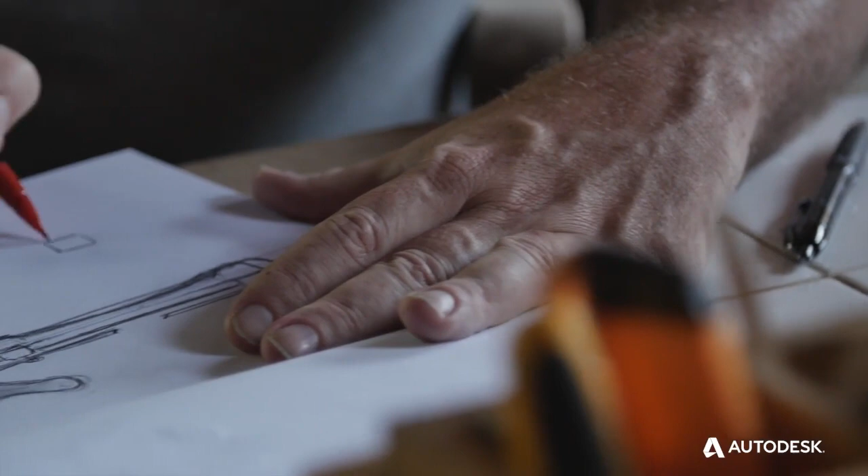The first computer-aided design tools were little more than replications of the drawing board on a computer screen. Soon after their introduction, people realized that while creating drawings on the computer was not necessarily faster than doing them by hand, editing them certainly was. Improved editing capacity made it possible to make more significant modifications to the design more frequently because of the reduced turnaround time in the change process.

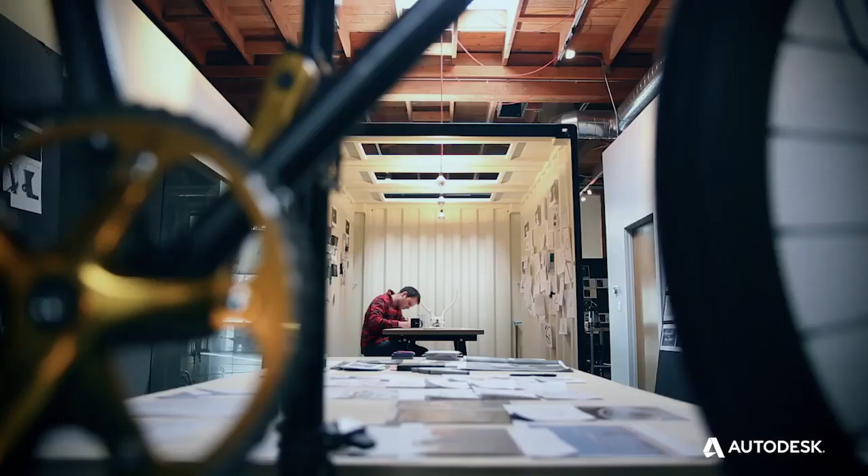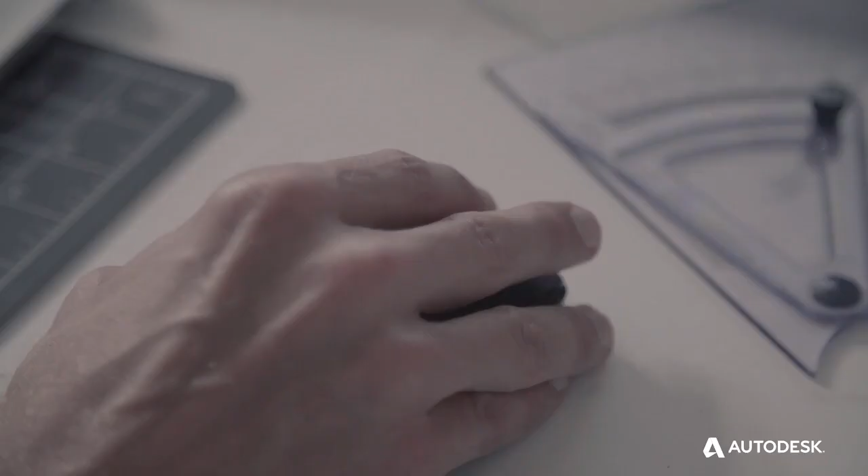The practices created for the drawing board existed because it was impossible to communicate three-dimensional data to people along the development process, but perhaps that wasn't true anymore. People started to ask why the computer couldn't develop the two-dimensional views required by manufacturing from a three-dimensional model, and some even questioned whether two-dimensional drawings would remain valuable in the future. Many predictions were made, and in most markets still remain unrealized, of a paperless design environment.

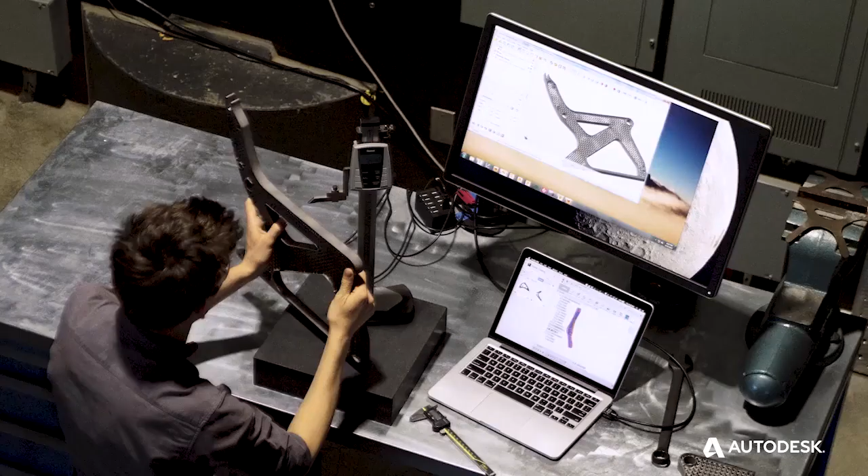These technologies changed the landscape of the engineering department. Where there were three tiers—drafters, designers, and engineers—there were now new options. Some companies merged the roles of drafter and designer, while others put more of the design process and detail in the hands of the engineers.

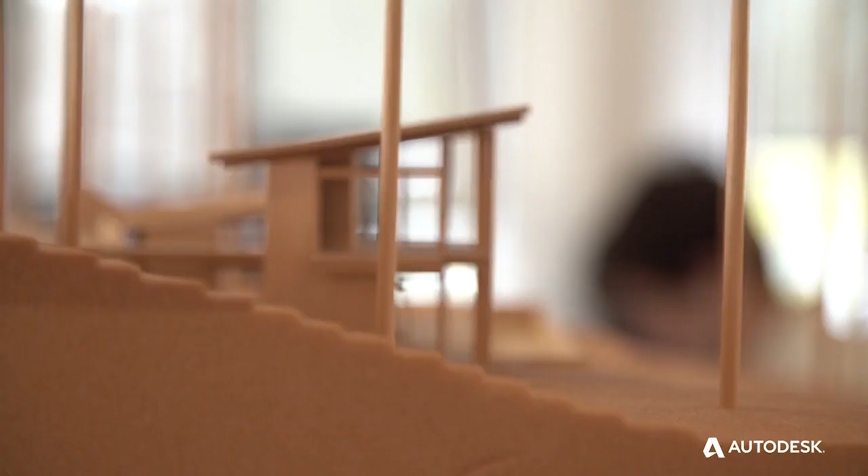Once development of 3D design systems began in earnest, the limitation became less about the vision of the people creating the software applications and more about the limitations of the computing power available at the time. In the mid-1980s, when CAD first began to expand in use, the basic system that would run AutoCAD cost roughly the same as a new car. A 40 megabyte hard drive was too large for the operating system to use in one partition, and 1 megabyte of RAM was exceptional. Of course, this was all just one side of the CAD CAM story.

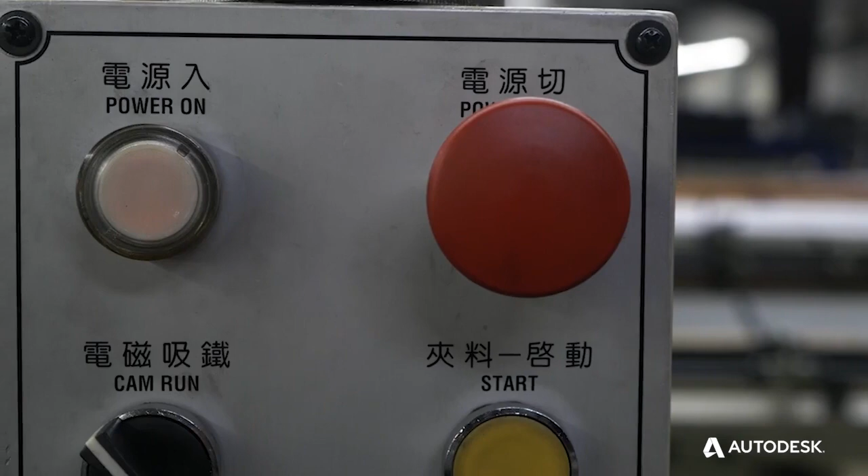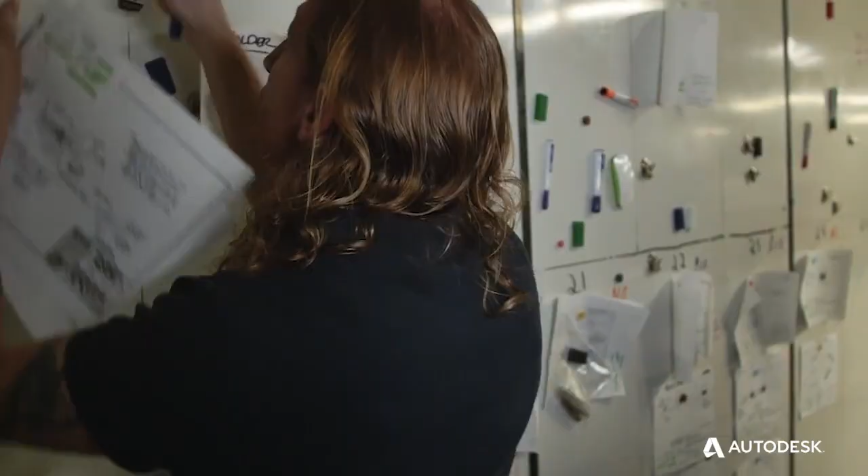The people in manufacturing were some of the first to adopt 3D modeling, developing 3D models from the 2D drawings given to them by engineering to assist in programming the computer numerical control machines that had existed for years but were difficult to program.

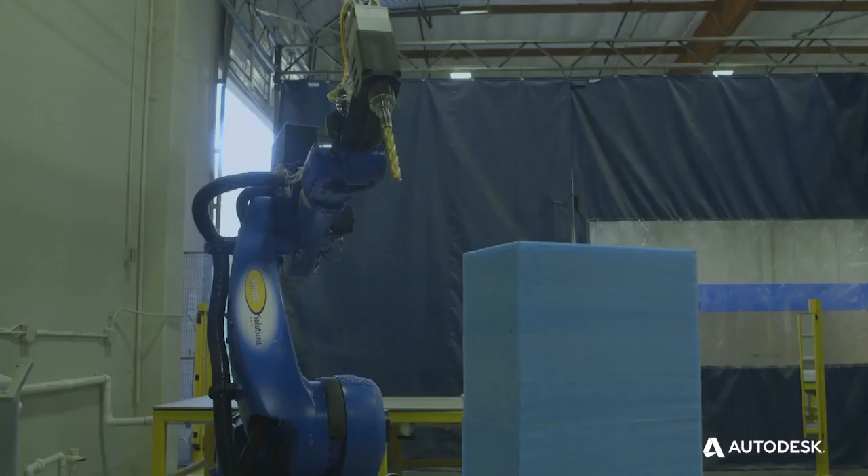With additional CAM tools able to program their behavior, the increased power of CNC machines made it possible to add more axes for cutting more and more complex shapes. The improved precision and speed for actuators, as well as advancements in cutter material, made precision less expensive. In some industries, the efficiency of high-speed machining started to make the use of castings less appealing.

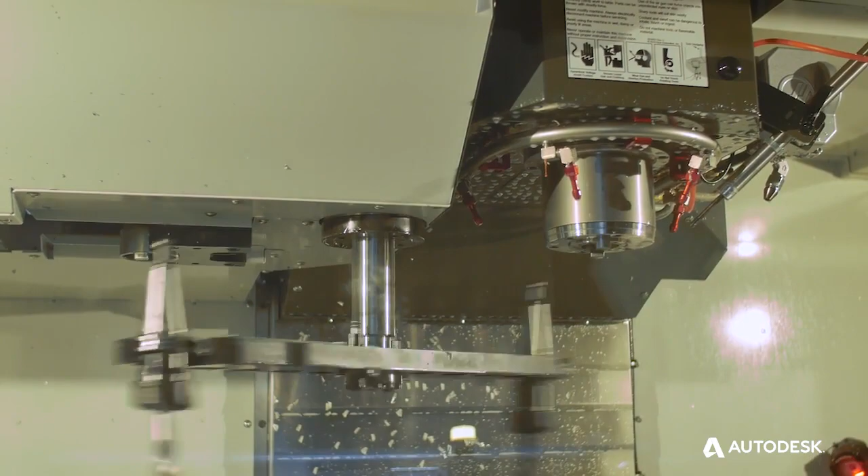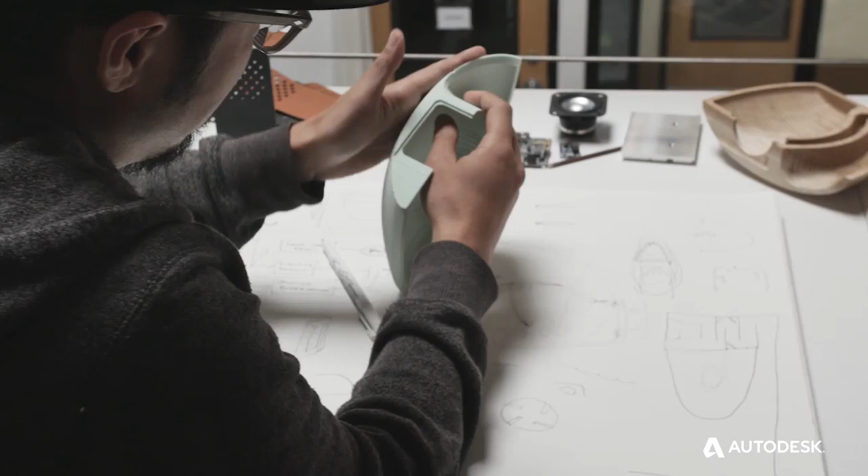CAD and CAM tools were developed largely in parallel, but without direct integration because of the different needs of the users. Some companies would adopt design standards geared toward making the programming easier, but the limitations on design innovation proved too costly. The processes used to create components controlled how those components were designed.

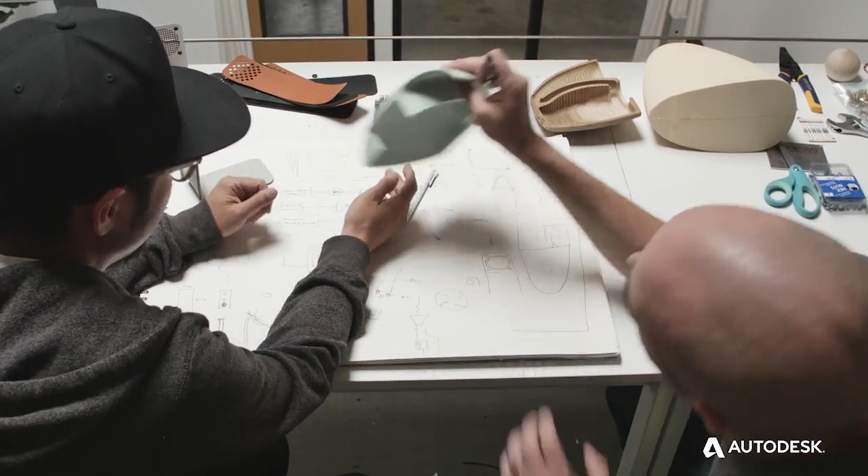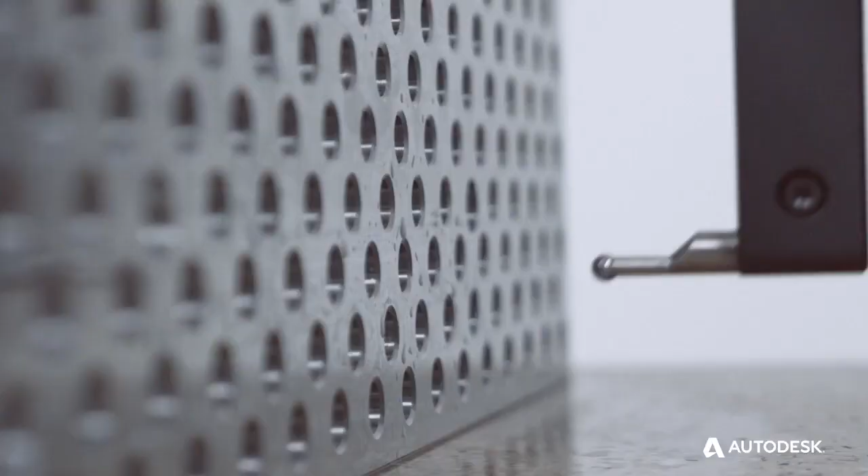Castings and molded components have to include geometries such as draft in order to be extracted from the forms and molds that make them. Because this type of component uses permanent tooling, it's cost prohibitive to change the tooling very often. This curbs the willingness to explore new ideas on an existing design.

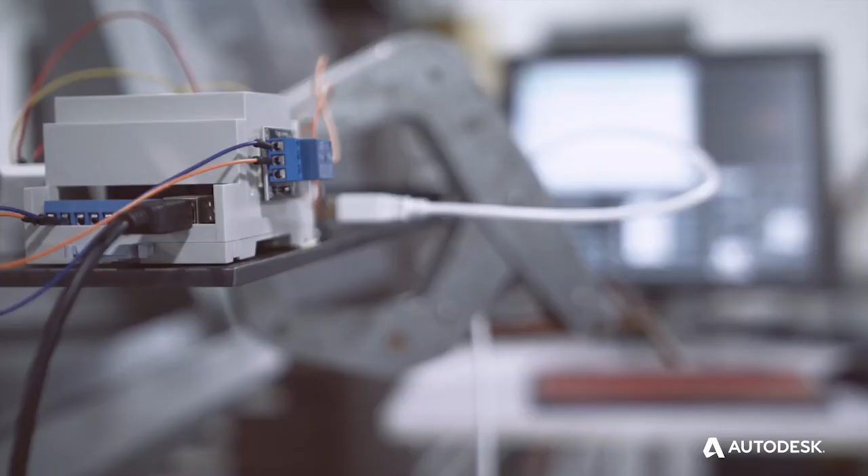Machined components have limitations on the depth of the feature based on the tooling restrictions or whether a tool can reach an area. All of this must be taken into account when designing the components that would need to be machined.

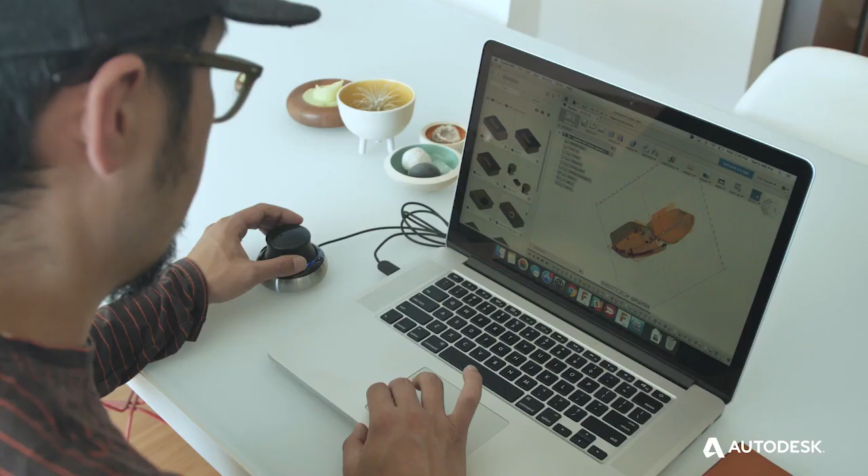The CAD and CAM tools began to develop closer and closer relationships, and now in tools like Fusion 360 are integrated into a single package. The flexibility for the designer and the engineer to work in the fashion that they need, and the machinist to program in the fashion that they need, without interfering with one another, is a fantastic breakthrough.

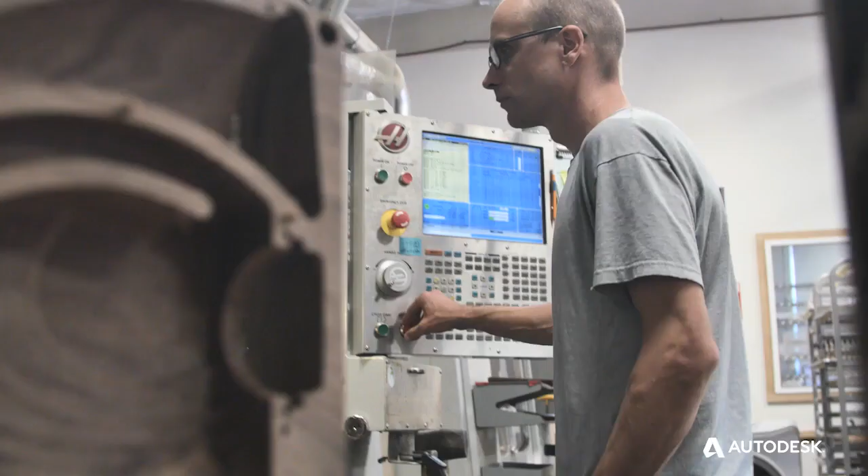The single connection improves the communication between the design and manufacturing sides, making it easier to design components that are more manufacturable.

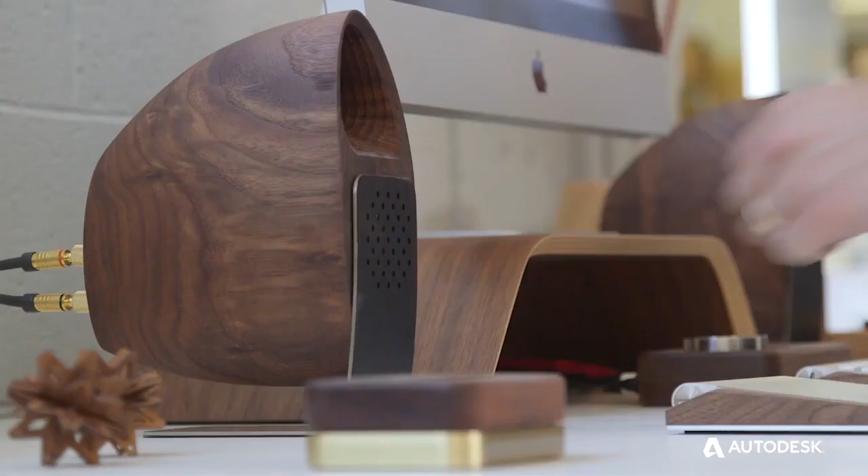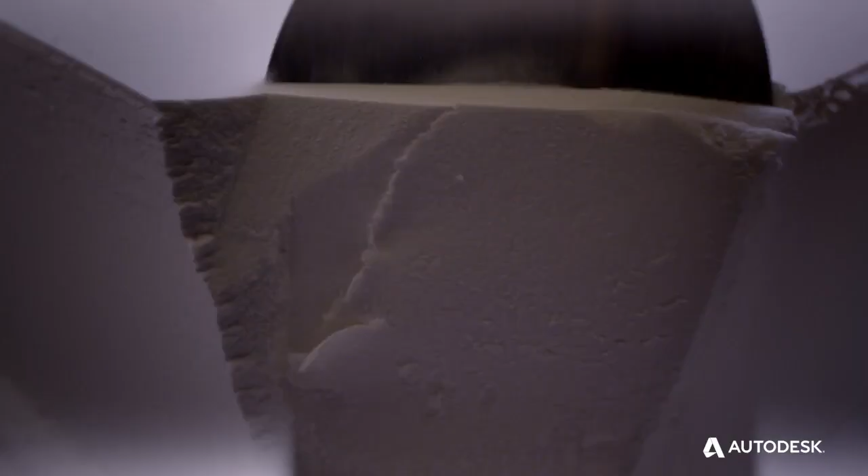Then came additive manufacturing. Additive manufacturing is sweeping away concepts of design for manufacturing, or at the very least, rewriting the rule book. Suddenly, the manufacturing process itself frees up the options for design. Initially, these tools were called rapid prototyping, or the even more dismissive 3D printing, but the potential for disruptive change in manufacturing is only beginning to be recognized.

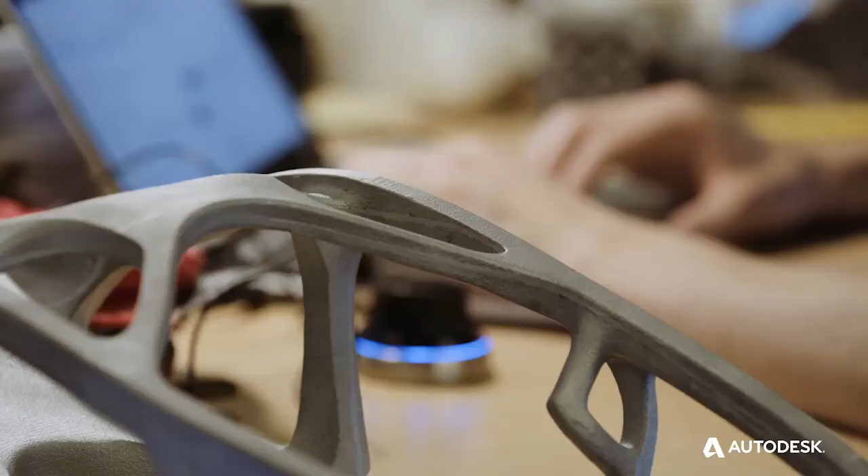Every day, more materials can be used in developing components with better material properties at the end of the process. Design technologies such as generative design are able to leverage the flexibility of additive manufacturing to define new shapes that would be impossible to create using traditional machining.

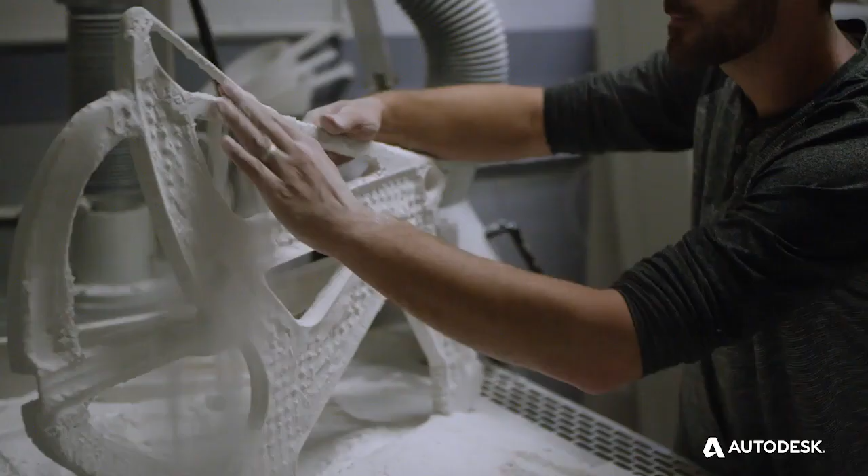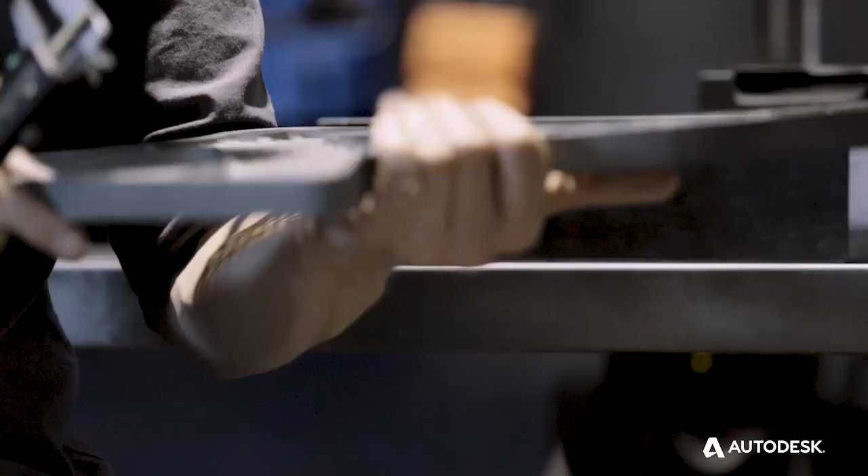When additive manufacturing and high-speed machining are combined, new forms that can't be cast can be created with less than finished surface precision, then completed using high-speed machining. This gives the time savings of having a casting with the flexibility of machined components for responding to design changes, because no stock has to be maintained.

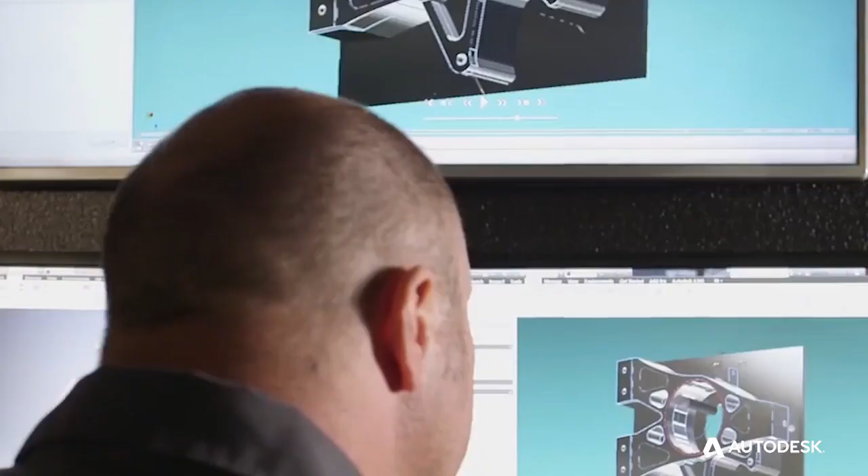As powerful as the evolution of CAD and CAM's individual processes has been, it's their merging that is providing the most promise for the future. When the manufacturability of the design can be evaluated as the design is evolving, it converts a serial process to a parallel process. Removing data exchange decreases the risk of wrong parts being cut.

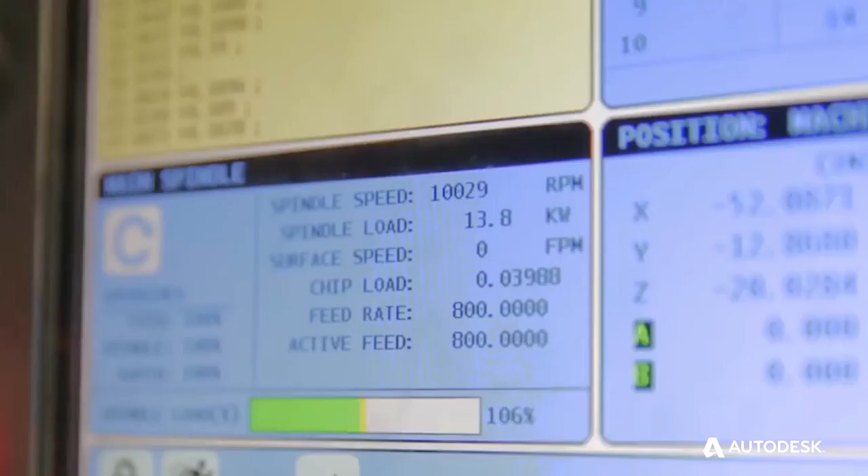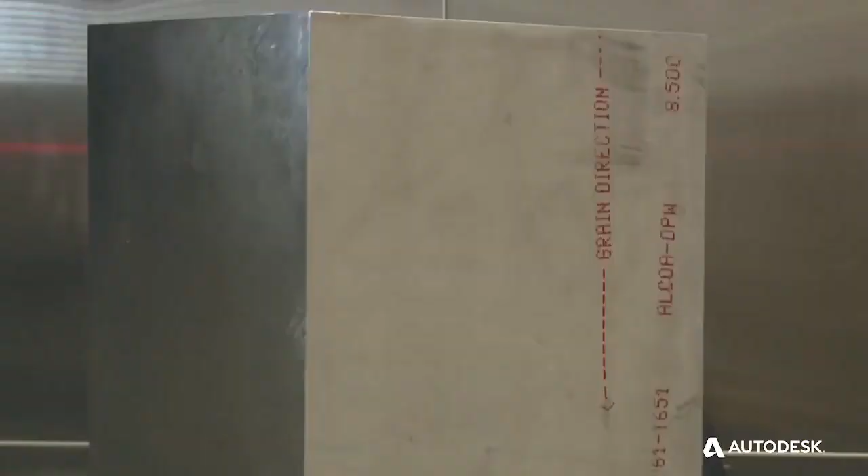Fusion 360 is a perfect example of how blurring traditional roles, responsibilities, and technologies can open opportunities for people who are not professional engineers or machinists to explore creating their own ideas, without the limitations the early tools placed on the process. It has taken a very long time for CAD and CAM to truly come together, and with the emergence of new technologies, new chapters in digital manufacturing will continue to be written well into the future.